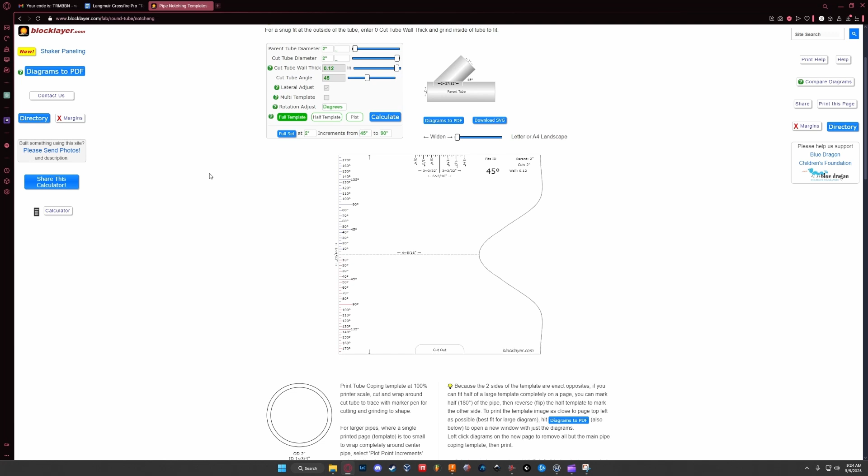Also, you will need to have access to tubing wrappers, specifically for the cut profile that you're wanting. For instance, I'm using Bend-Tech to get my cutting wrappers. If you do not have access to Bend-Tech, you can also use a website called blocklayer.com. The link for this will also be in the instructional guide.

Once you're here, you can just input your diameter and everything, and it will give you a cutting wrapper. You can take this as a PDF and insert it as a canvas into Fusion, and then follow along from there.

Bend-Tech is really cool because you can design an assembly quickly, and it also gives you the parts length, the material it's made out of, the weight. It also notches the tubing for you and gives you that cutting profile. So that's what we're going to be using here today.

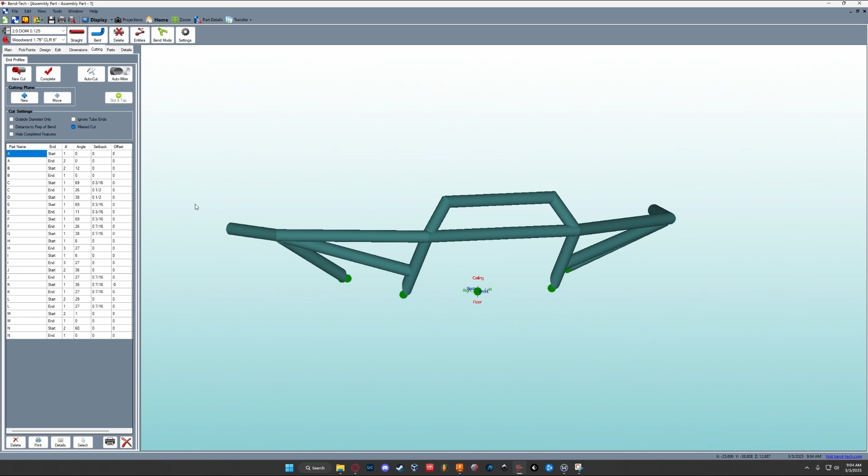So in Bend-Tech, I'm just going to pick one of my tubings here. Let's go with C. So if we double click on C, you'll see it gives us a cutting wrapper.

All we need to do is print and save this as a PDF. The only thing to remember here is to leave it as 8.5 by 11, because we're going to use that to calibrate the canvas in Fusion.

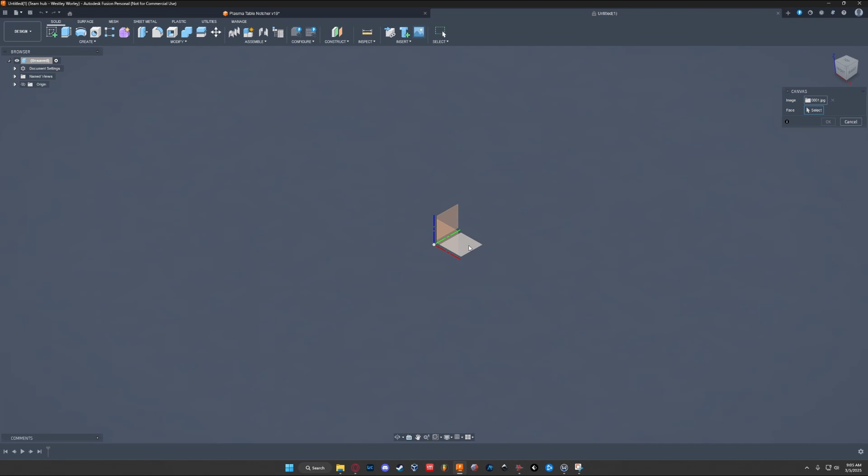So once you're in Fusion, all you need to do is click Insert and Canvas. I already have a few of these from an earlier project, so we will grab those now. My table is set up to cut off of this plane here, so that's what I'm going to select. We don't need to change anything, we can just press OK.

Now that we have our tubing wrapper imported, we need to calibrate it so that it's actually to scale. So we're going to go over here. I need to change this to inches. Then we're going to go under canvases, right click it, and click calibrate.

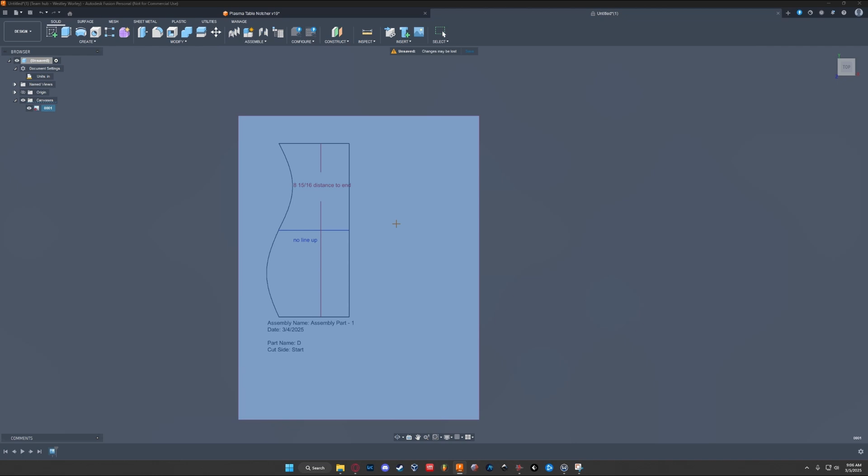So we know that this is printed off of an 8.5 by 11 sheet of paper. So we're just going to grab this corner here and get this corner and set that to 8.5.

And we'll zoom out. From here, we're going to press New Sketch, and we're going to do it on this plane. Basically, all we're going to do is copy this profile here.

You don't want to copy this entire profile because this would cut off your notch. You just want this one.

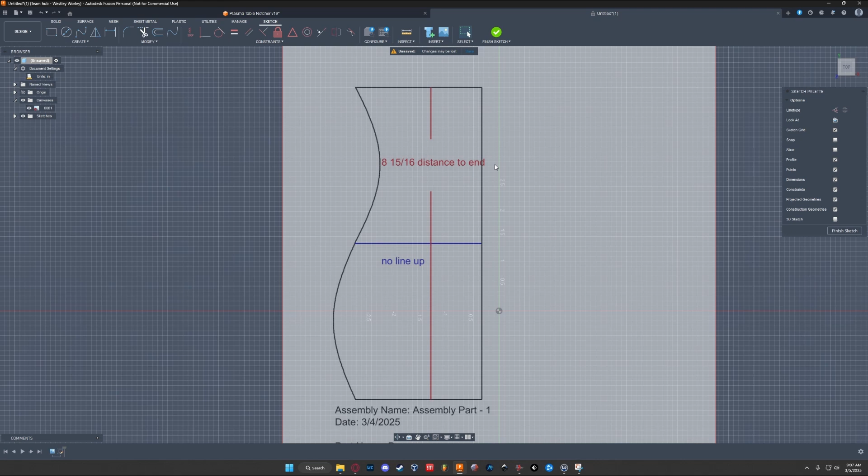In this case, we're going to use a fit point spline, and I like to disable snapping because it sometimes hinders you. So we're going to start here in the corner and then just follow the outline here. Once you've traced your profile, you just want to press Finish Sketch.

This is all you need. Now we're ready to go into the Manufacture tab. So once we're here, we're going to click Setup.

If you have your machine set up here, you can click Select and open your machine. Everything here can stay the same. We just need to go to the Stock tab and change Stock Offset Mode to no additional stock.

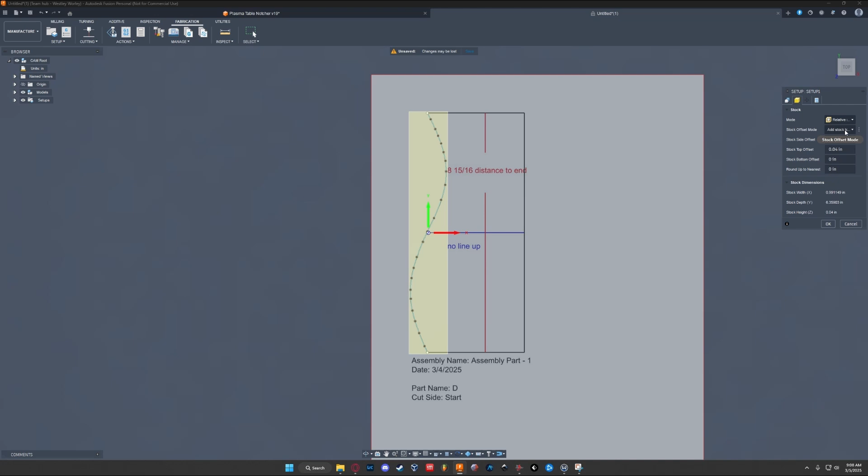Now we need to go to the 2D Profile tab. In here, you'll select your machine. In my case, I'm cutting 2-inch diameter, that is an 1/8 inch thick. So I'm going to leave the cutting rate at 90.

Under the Geometry tab, we're going to click this little drop down arrow and select Chain. Then we'll select our profile that we just traced and then press OK.

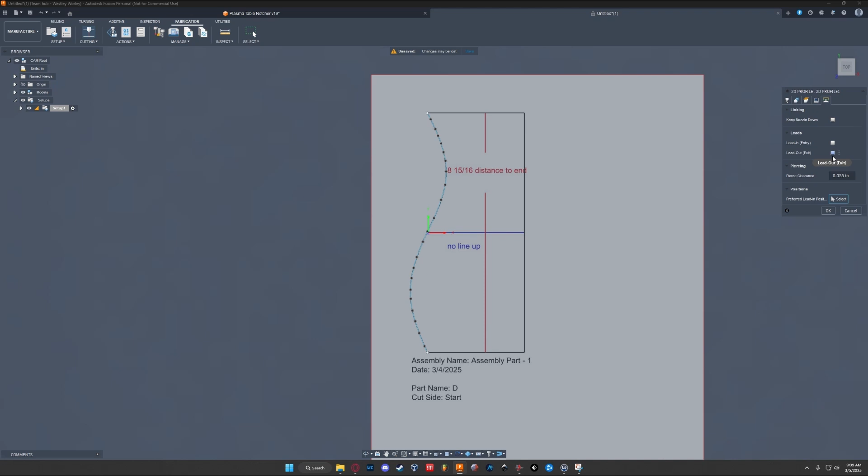On the Heights tab, you can leave this alone. Under the Passes tab, it's very important that you change the sideways compensation to center. On the Linking tab, we're going to get rid of lead in and lead out. We don't need it.

Now we're ready to post-process. Click the post-process button. Now we can just give it a name and then press post. And now we're ready to upload that into Fire Control.